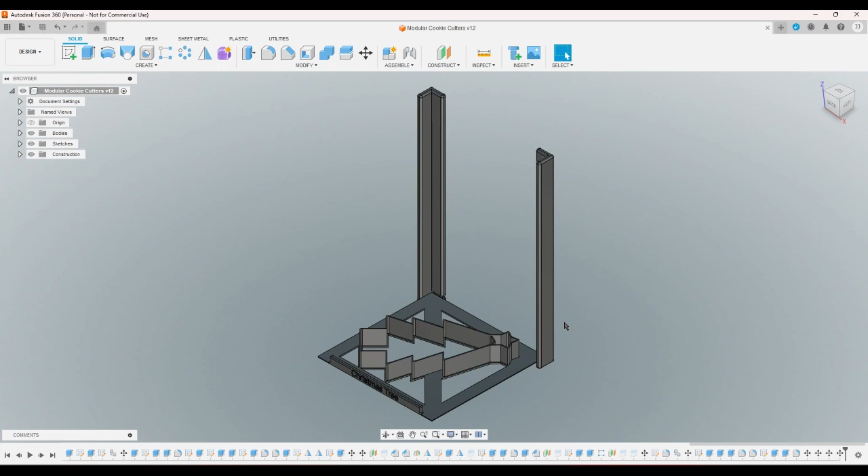Okay, so the Christmas tree cutter is currently printing, and I know that the sleeve works, and I know that the design for the cutters works, so I'm not going to test anything else anymore. I'm just going to make cookie cutters, and each one is going to be its own video.

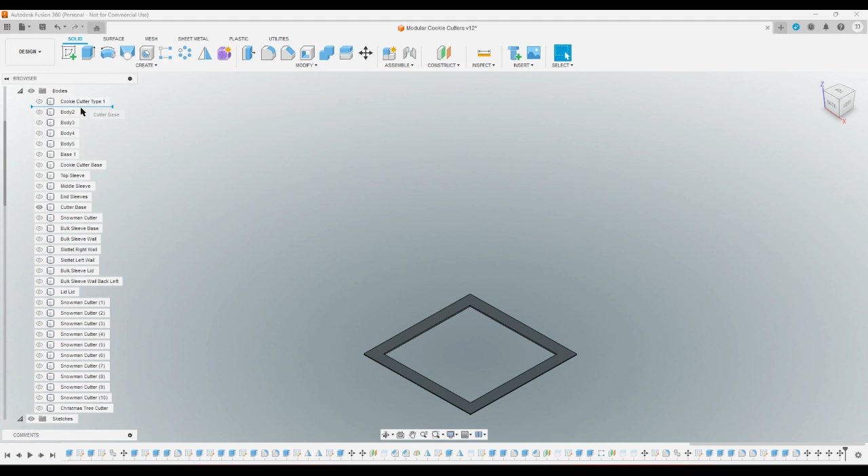So, real quick before I forget, I'm going to rename this to Christmas tree. And I'm going to rename this to Christmas tree label. Alright, and now I'm going to do the reindeer. So, where's the cutter base? This one? Yeah. Can I move this like way up to the top? I hope that stays at the top. Okay.

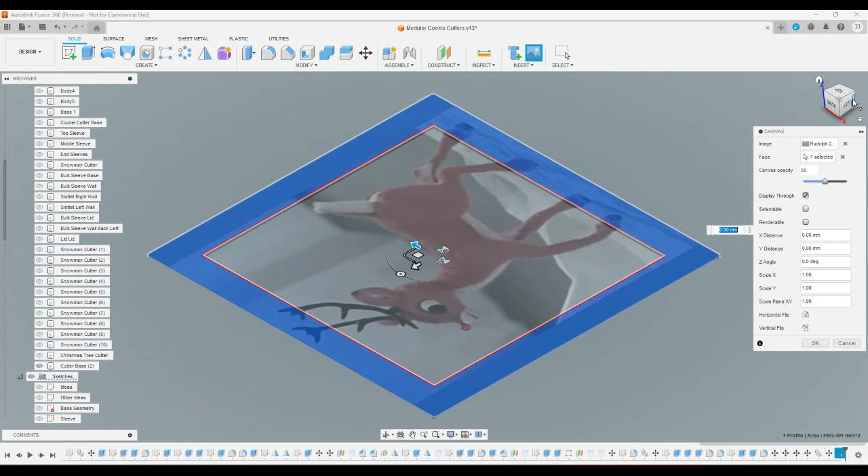Make a copy of this. Go all the way down here. Start a sketch on it. And now I'm going to bring in a picture to trace of Rudolph the Red-Nosed Reindeer. I wonder if, nope. Okay. No, it's actually a little too big. Okay. Alright. This is Rudolph. Where's the... Okay. This is Rudolph from that classic movie. Everyone knows it. And I'm just gonna trace this.

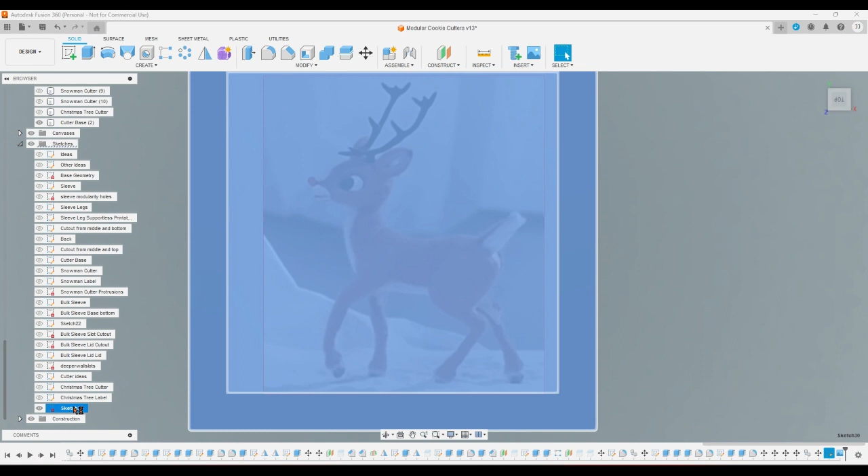So what in the heck? Sketches, construction. Where'd he go? Oh, weird. I guess I gotta make a sketch after I bring in Rudolph. Whatever. Make a sketch here. Okay. Now there's a lot of curves here. And there's a lot of skinny bits. And skinny bits aren't good for cookie cutters because they burn. So this is going to be a bit of a pain to trace.

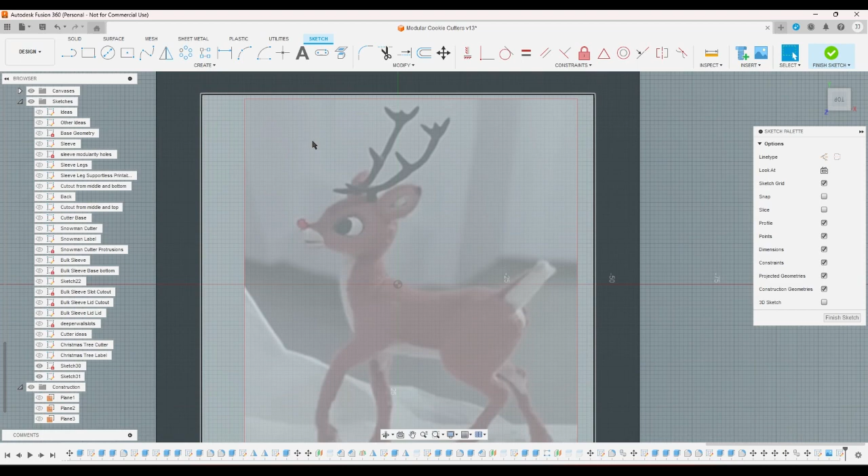Kind of. I'm going to have to take the antlers and go around just the general shape and not the full shape of the antlers because that's just not going to make a good cookie. And I'm probably going to have to do the same thing with the legs. I'm going to have to take his legs and wrap around like this instead of doing the whole leg. So, yeah. And even the tail I might actually change a little bit. I'm going to start with the nose though, because the nose everyone knows.

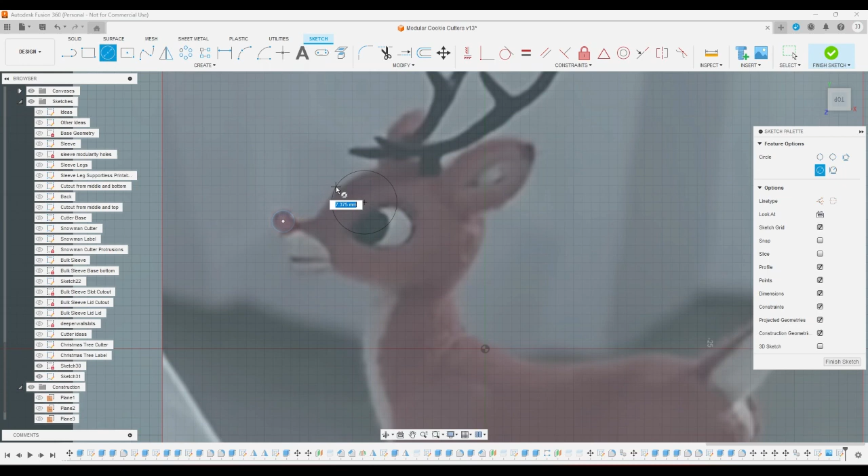Alright. Nope, that's not a good, okay. Gotta go ahead and, arcs are your friend. Arcs are my friend here. I think this one can be a line. Let's see if I go with. Can I go with this? Yeah, that's pretty good. What about this one? Yeah, that's all right.

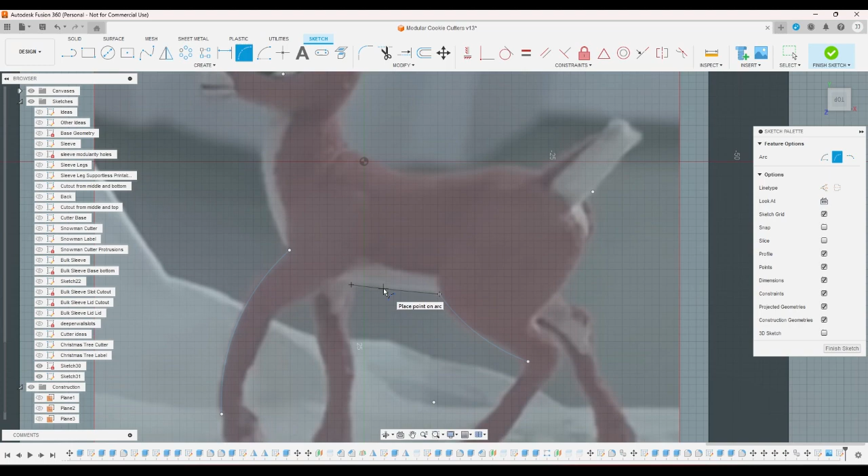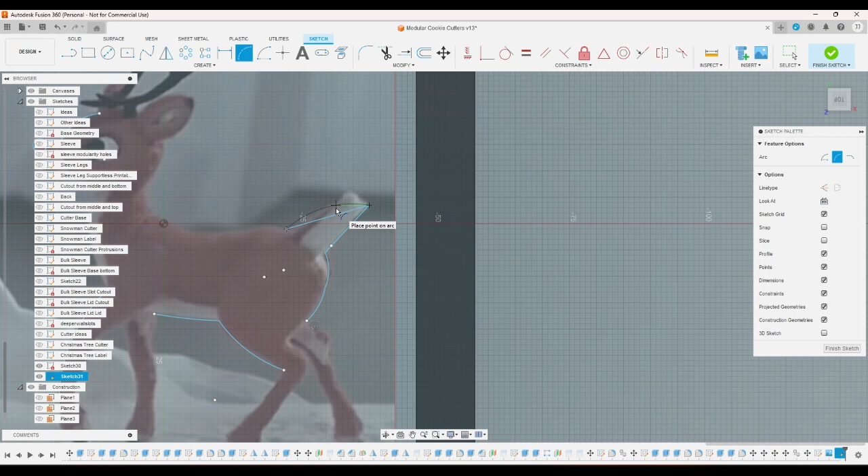Alright. Gonna change that a bit. No, don't make it. Yeah, okay. And then his tail is gonna be a straight-ish line. Should I do this? Should I cut off that white part? I don't know. Alright, I'm gonna go ahead and, I think I can get away with a straight line here.

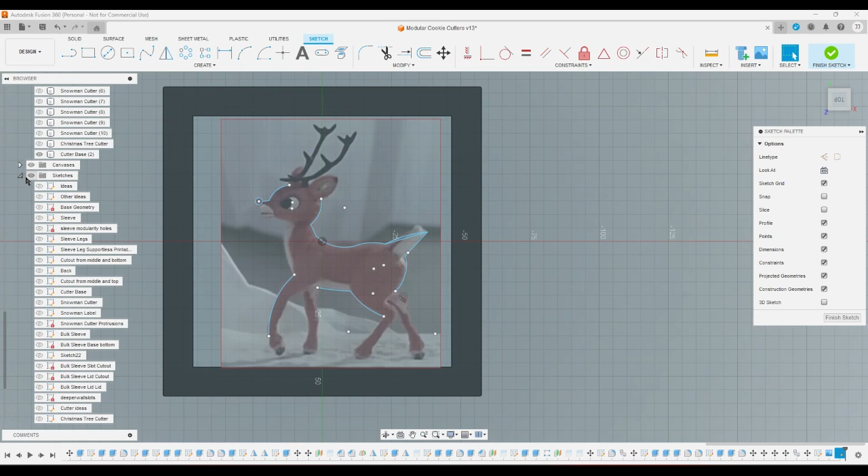Ah, canvases, okay. Yeah, that's looking good. Let me see what happens when I delete that versus if I delete this. Yeah, the curved tail is better. That is, of course, assuming I don't just do that and maybe even move that the whole. Okay, stop that there because that's gonna move. Okay.

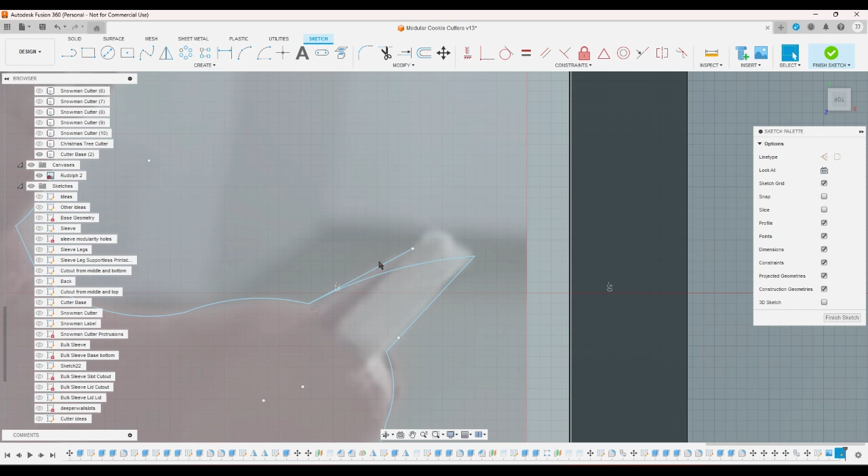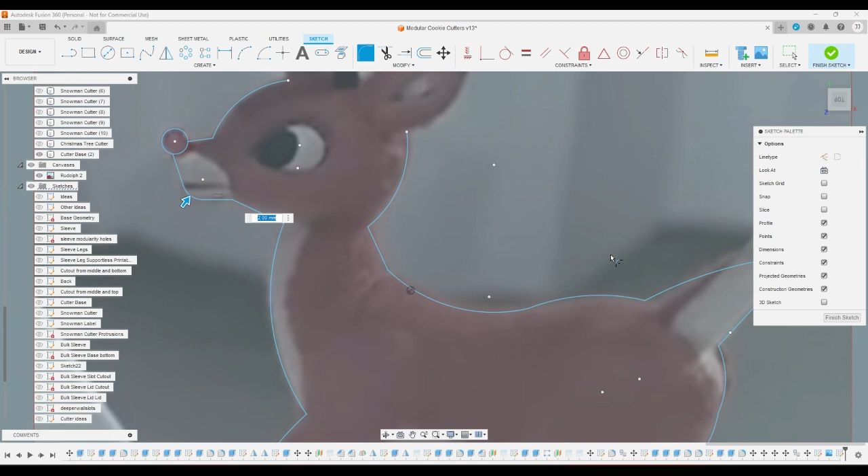Alright, and then I wonder if I can. Yeah, okay. Can I? Alright. I feel like maybe straight line, straight line, straight line. Hang on, something's trying to snap to the grid here. Where's this? Okay, snap is turned off. Let me turn off the grid. Okay, and then if I just, yeah, that looks good.

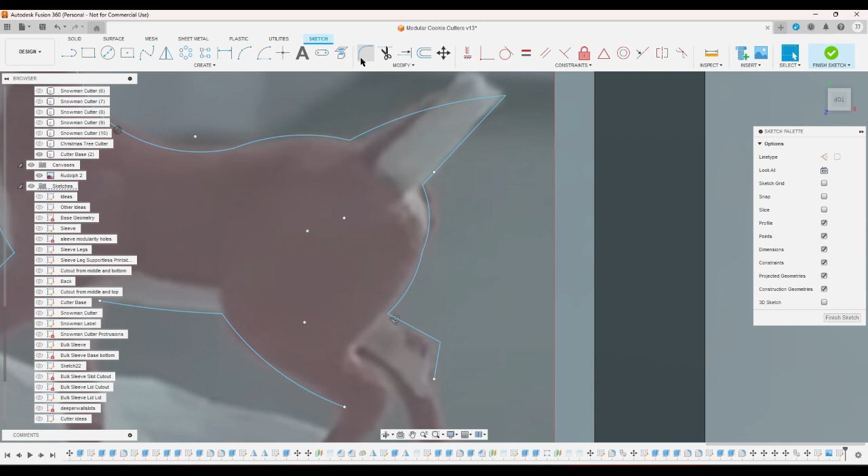Gonna do his ears here. At least this one. Then I'm gonna go ahead and finish off the head. And now I have to, no, not yet. I'm gonna ignore the antlers till the very end. Let's do a straight line like that, curve that in, and then another straight line here. Yeah, that looks good. That's starting to look pretty reindeer-y.

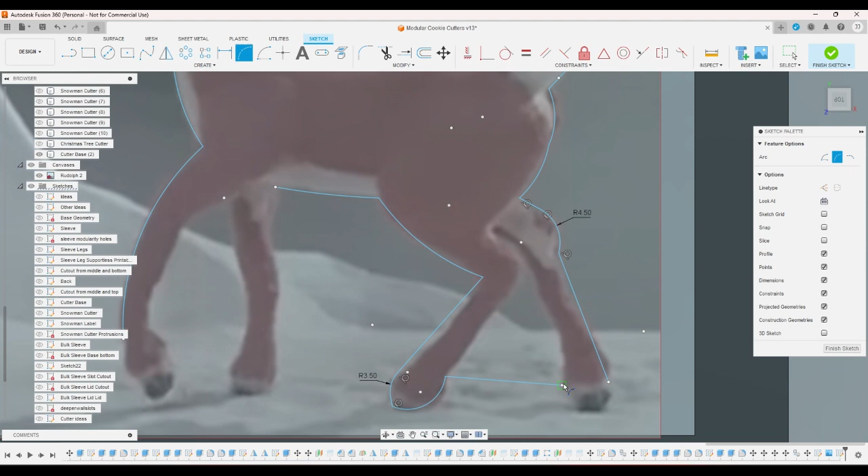This will be, alright, and then this will be a straight line to those, and if I can... Okay, now this is the part... Oh no, that's disgusting. That looks ugly. Okay, I'm gonna add the legs in because maybe I can just have them as details.

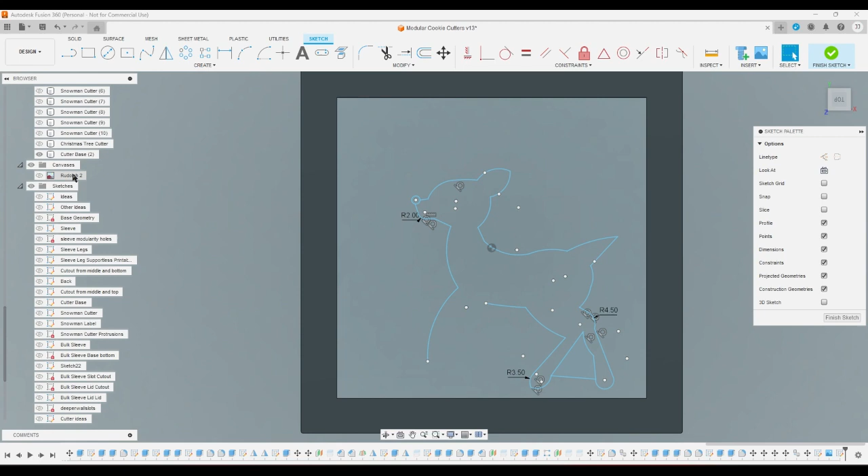Yeah, if I have the legs as details. Can I extend this? And that? Yeah, okay. I'm also going to go ahead and delete this and put that there. Let's see, this looks like it's going to need two curves.

And then this one is going to go all the way. Yeah, I'll just do that. Straight line down here. And then a curve up to about there. This leg is really curvy, jeez.

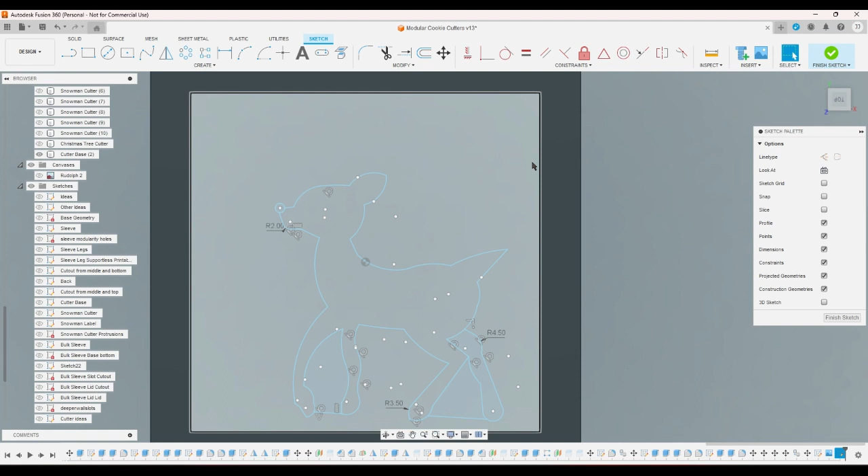And then except for some bits somewhere that are not connected, I've got pretty much all of Rudolph here. That's where they're not connected. That's close enough that I can just, and that should not be noticeable. Yeah. Okay, so I've got all of Rudolph except for the antlers. Now I gotta do the antlers.

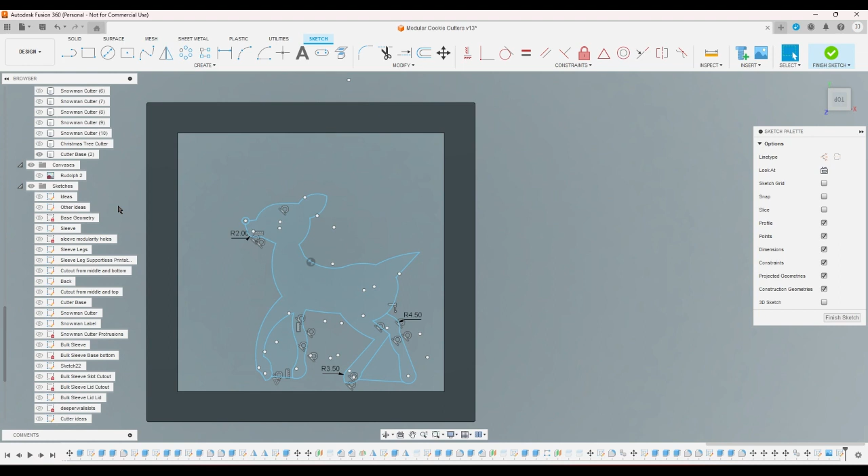I'll go ahead and ignore that second ear. Okay, so then I think a good, I'm not sure if this is a good way of doing it. I don't think. Okay. And then if I just, you know, if I go ahead and keep a curve here for this, but no.

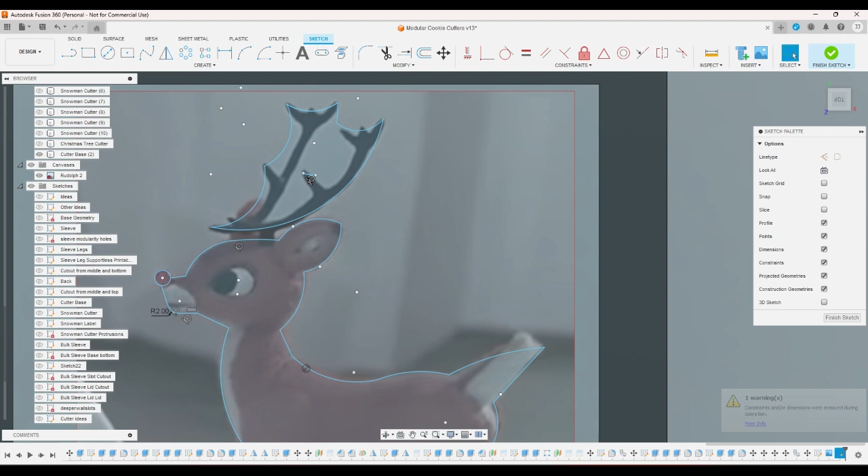And I just extend this one out to there. And then I go ahead and trim all of this. Does that look like antlers? Something. I think if I keep this much as the outline and I use the inside bit as details, I think that's what I should do.

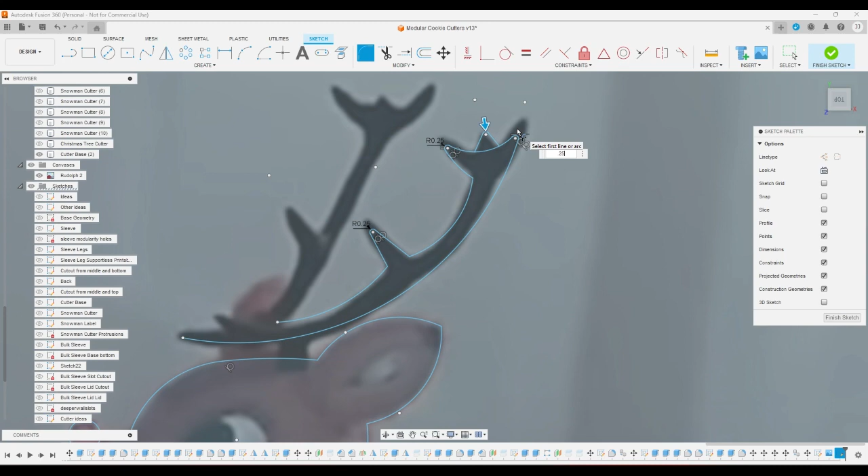Let me just trace the antlers themselves. Then I'm just going to go ahead and, yeah, I think that's a good idea. The antlers will be details that are going to be inside of a bigger outline, I think. Like how the legs are going to be.

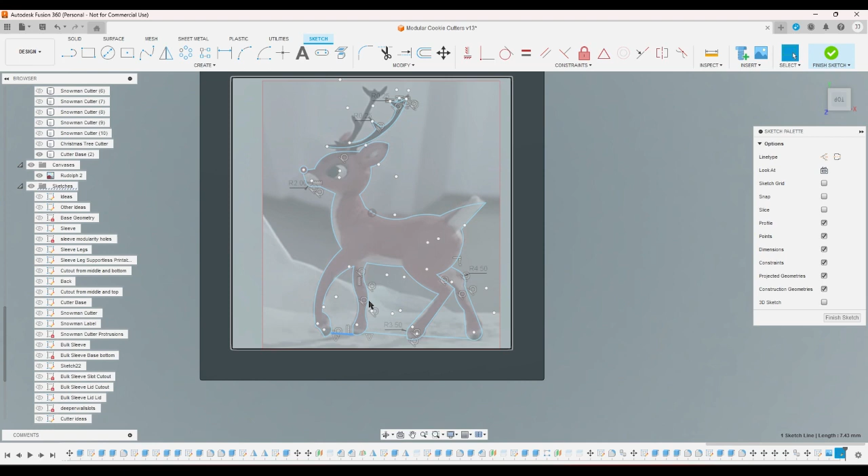And you know what? Since the legs are going to be details like that, might as well have the whole thing down here be cookies so that these won't get burned. Alright, this one's a lot straighter. I can probably get away with just a line here. Yeah, barely, but I can.

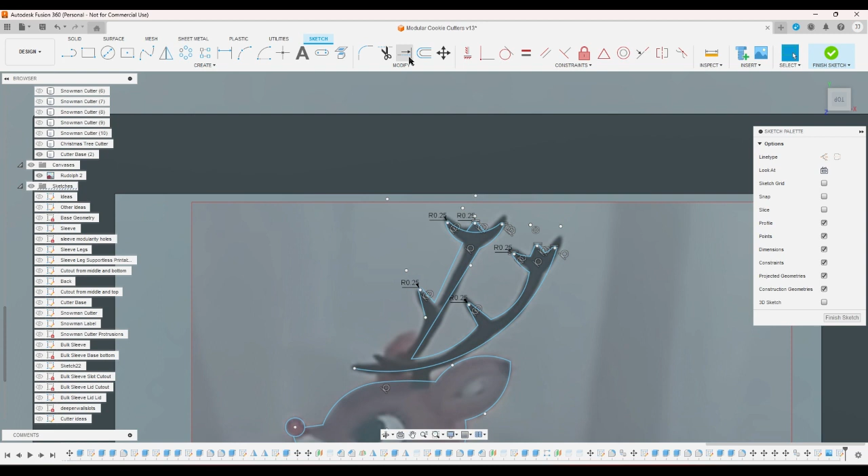And then, what? I don't know what happened there. Yeah, that's good enough. Yes, I know. And then if I put this there... Whoops, wrong shape. It's supposed to be an arc. And then I get... Holy... Alright, and then if I just go ahead... So that's the shape of the antlers.

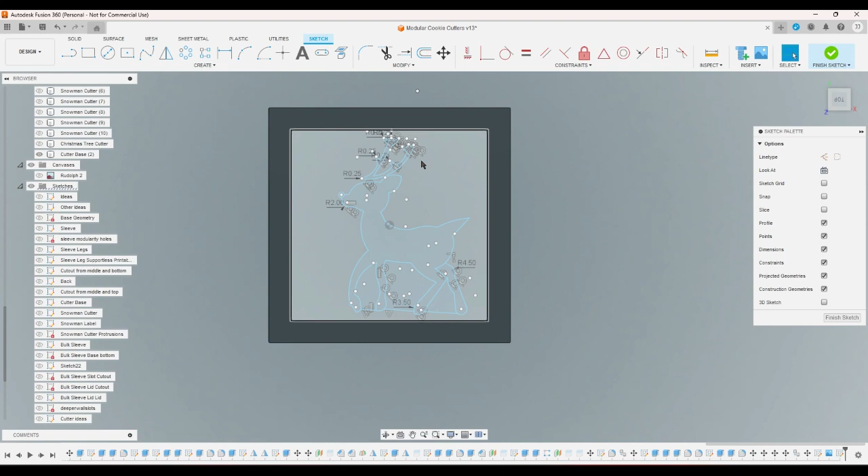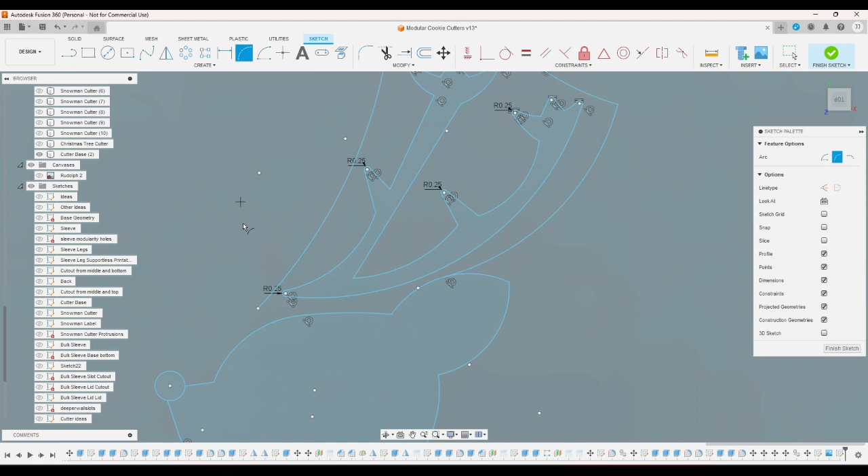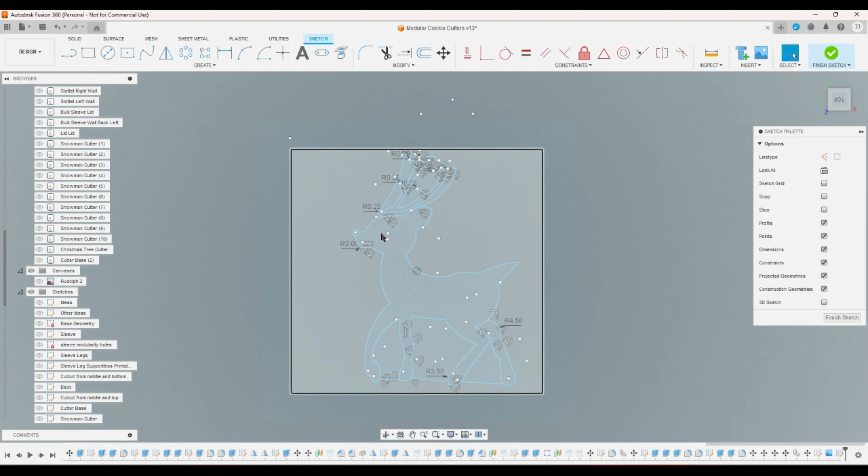So now if I go and just kind of... Well, I might as well make it as nice as I can make it look. Wrong thing got trimmed because the stupid program is like, oh, you're hovering here, that means you want to click there. Alright, and then... I don't see... Wait. I don't see... Oh. There. Okay. Good. That means... Okay.

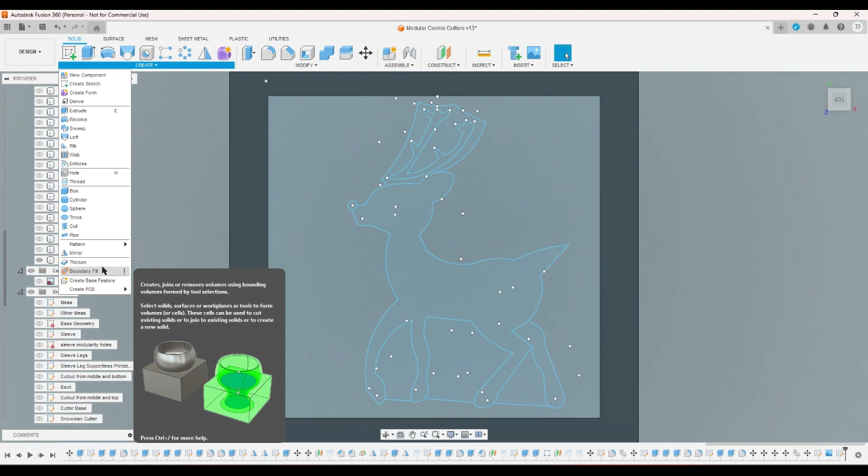Now the hard part is I gotta figure out what to offset by what. I wonder something. Can I... No, I can't do that. Okay. Boundary fill creates, joins, removes volumes using bounding volumes formed by tool selections. That's unfortunate. Okie dokie. Offset this by cutter thickness.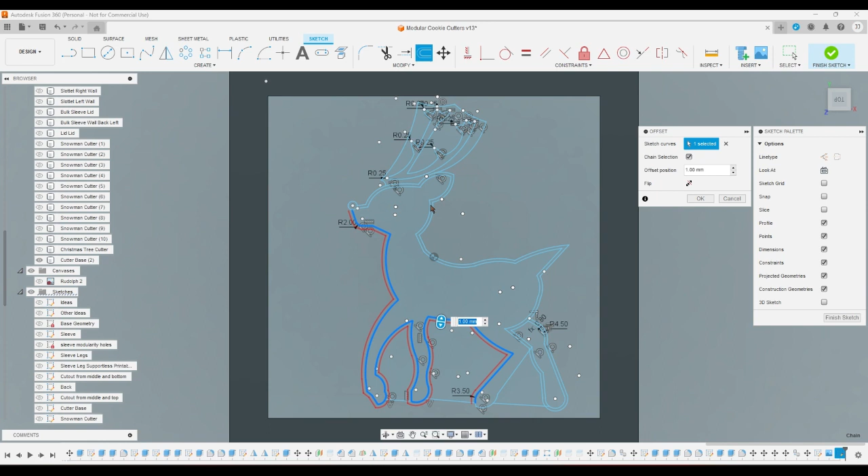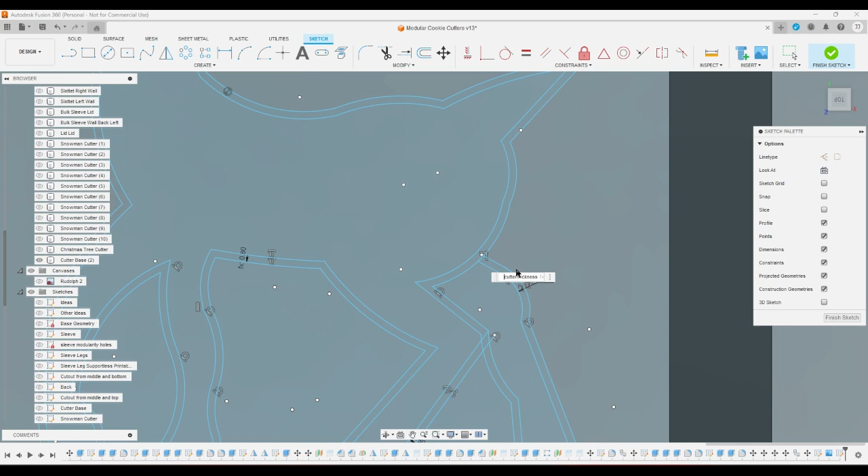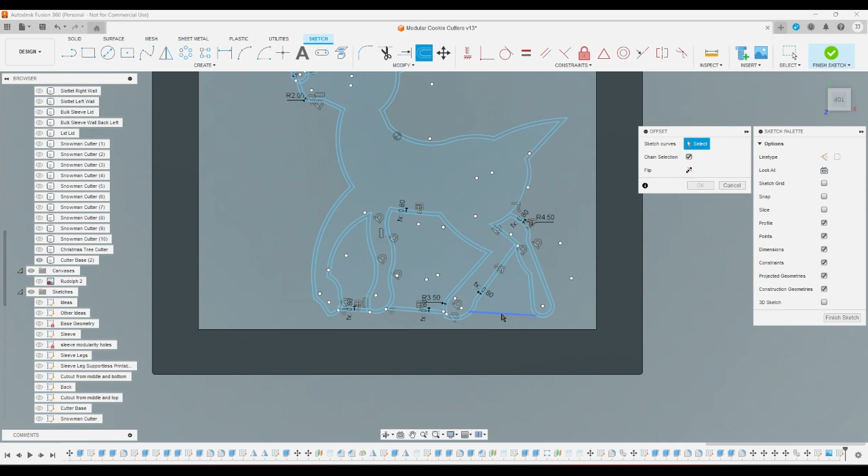Let's see, this. Okay, those two intersected. Let me just offset what I can. Oh, cool, cool, cool. That puts that. Alright, so now let me figure out. Oh, wait, hang on. This. Alright. That one has to be negative for purposes. Alright. So now let me try and figure out what I can do about this.

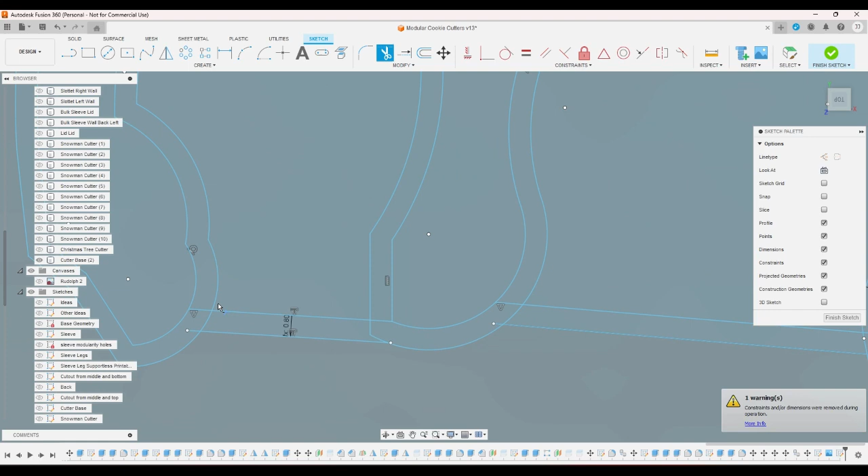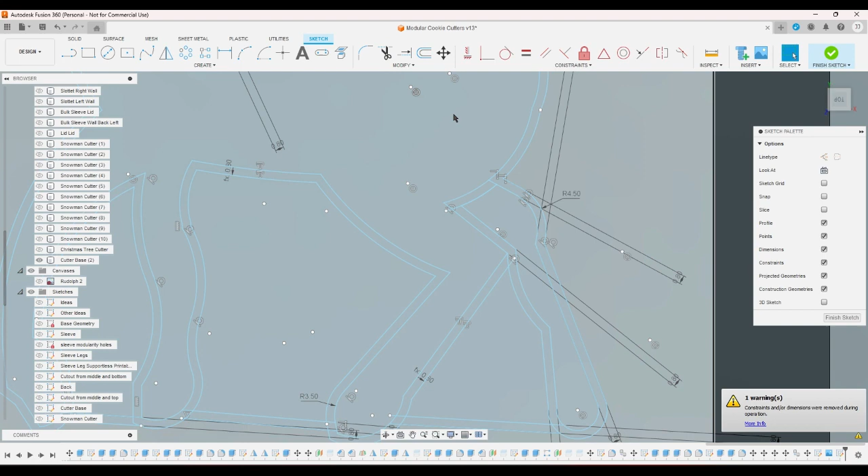Okay, so then if I trim here, right? Okay, good. That's its own section. That's its own section. That's its own section. That's not its own section yet, because it's still connected to this. Now it's its own section. So then if I extend this one, and then I trim here, and then I trim here, alright, then I get this.

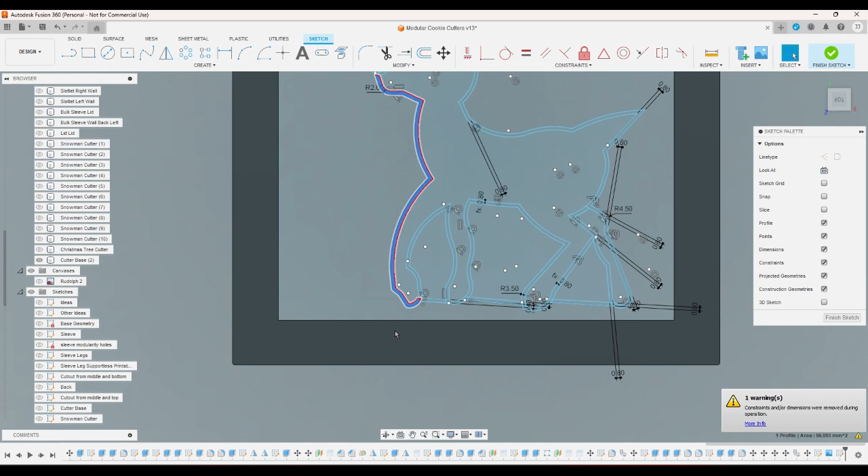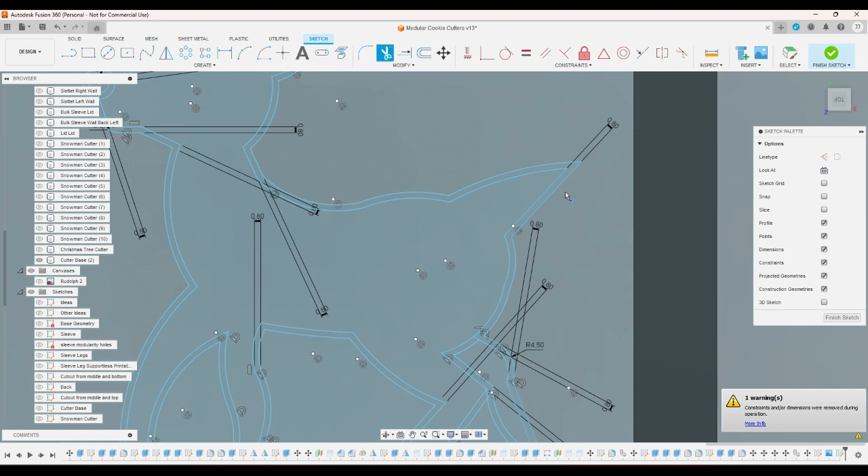Trim these. Okay, so I've got that whole frickin' section. Then I've got this, going all the way there, and then I've got this. Okay. So I think I can make sense of the bottom half now. Except that I forgot to round off that tail there. And if I offset just the tail, I just want the tail. Give me, stupid thing.

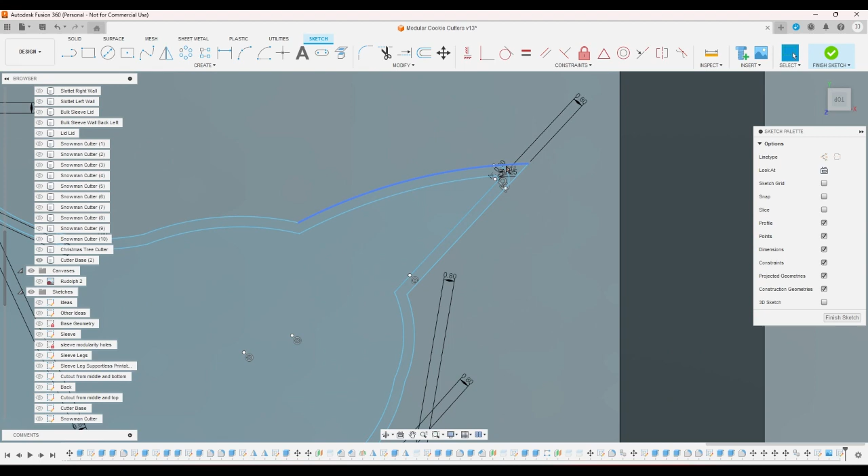There. Okay. That's going... Okay, cool. I just gotta figure out how to force that to... Oh. Oh, that is something I was afraid of. Okay.

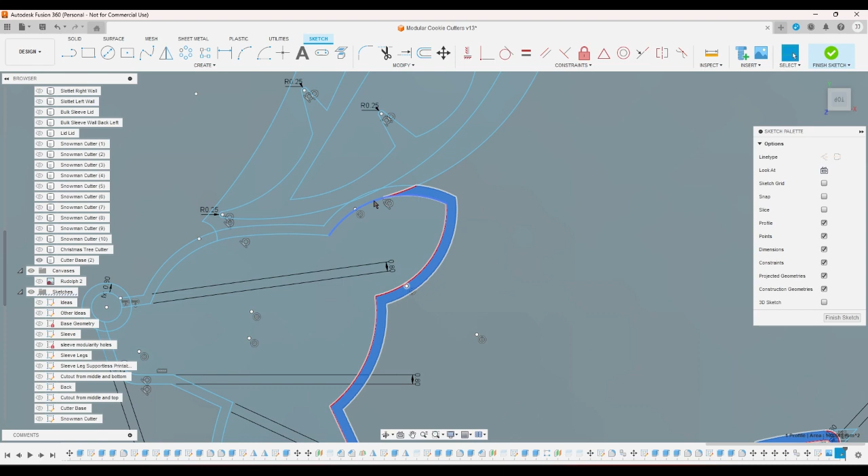Gonna go ahead and trim. What do I want to trim? No, I don't think I want to trim anything yet. But I have to offset this piece by negative cutter thickness. Because if I get all of this out, and then I also get this out, then this can be...

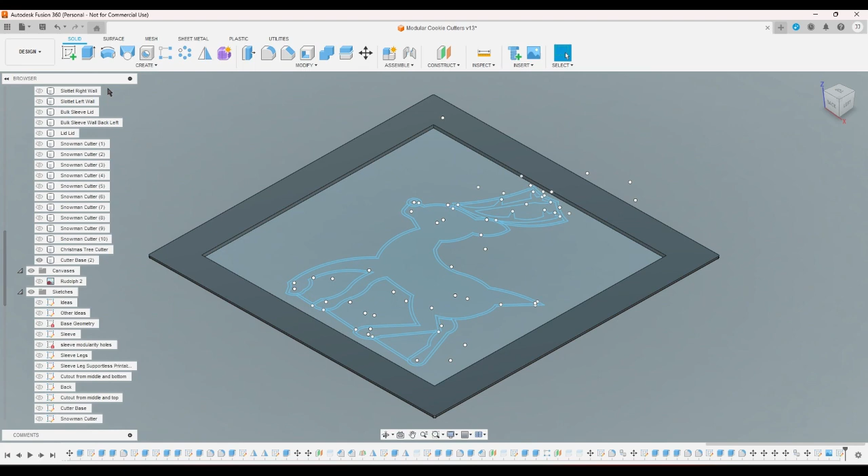Okay. I'm gonna go ahead and just get things started here. This one's gonna have to be several different sketches because I don't want it to get too messy, and it's already very messy.

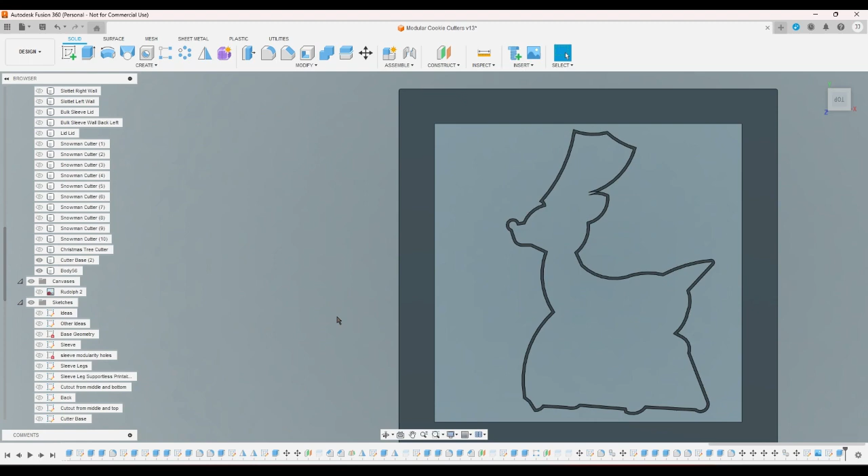This is the cutter height. Alright, so what's that look like? That looks like a really... It looks bad right now. I'm not done yet. Okay. This has to go basically to here. And get this in there. Okay.

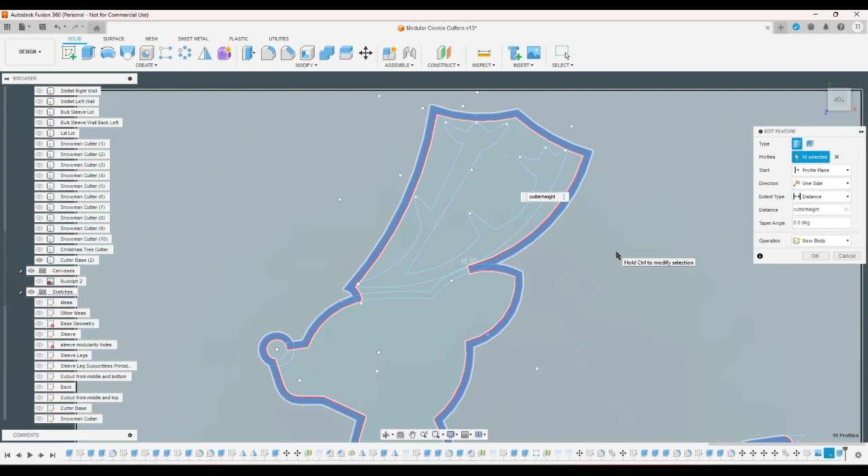Okay, so now if I bring back the sketch, and I extrude this part, and these parts.

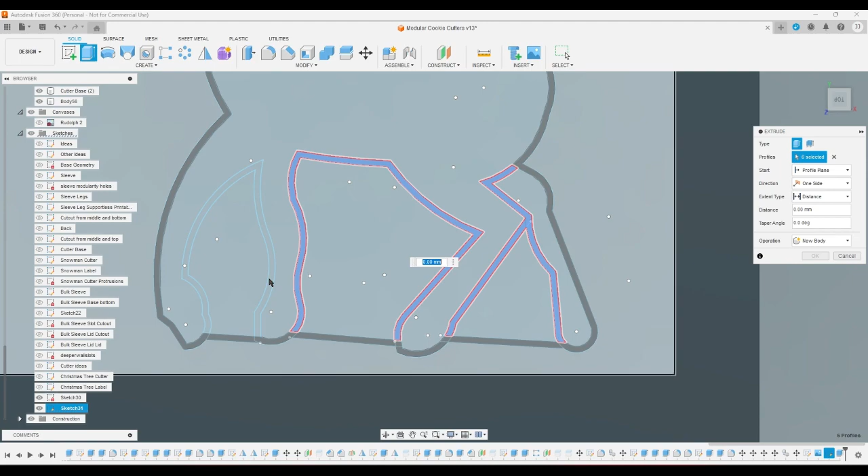To cutter height minus detail depth. I don't know where that came from. Okay. And then so now I have what should look like a reindeer. Yeah, okay.

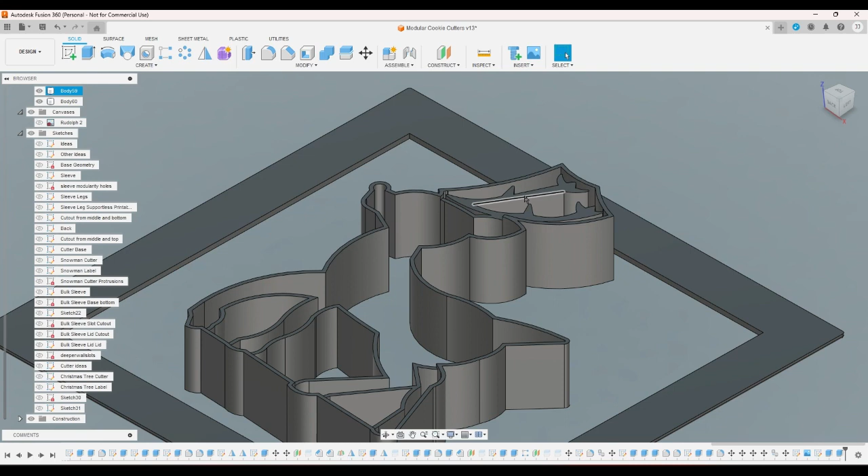I'm gonna put a sketch here and project... why are these not the same? Okay, cool. So now I can put a sketch here. Go ahead and project this.

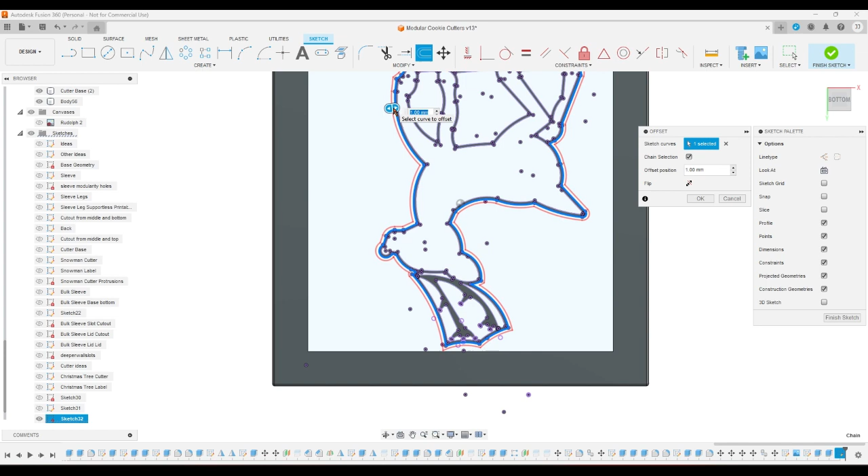Offset the outside bit by that. Offset the inside bit by that. By negative that. And then if... I might just close this, but I don't know how that'll affect anything.

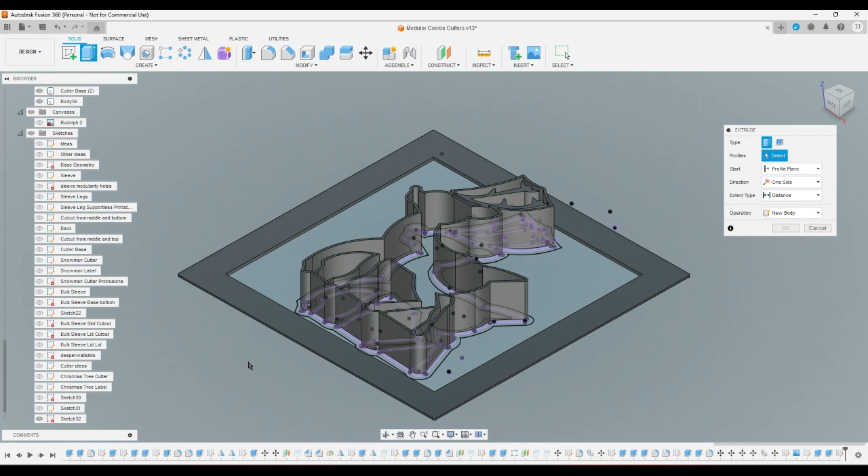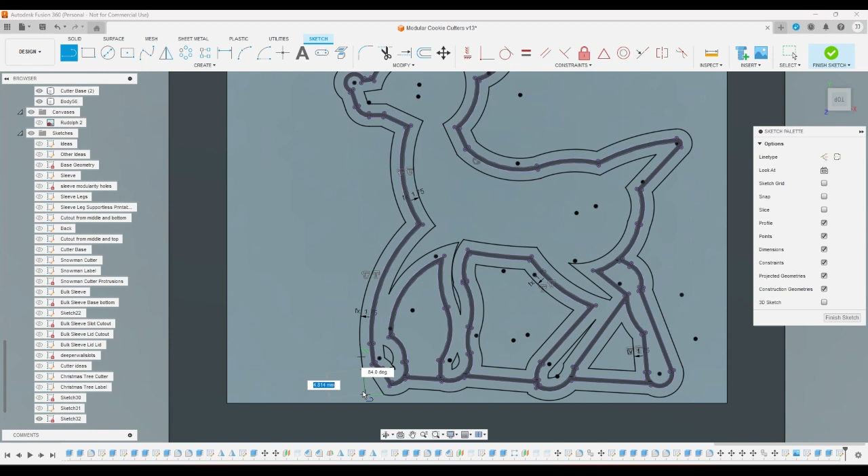Go ahead and close up these gaps here. Hang on. Okay, I'm gonna have to do a little bit more. Okay, and then this one. And then I'm gonna go ahead, put this just straight down, will work.

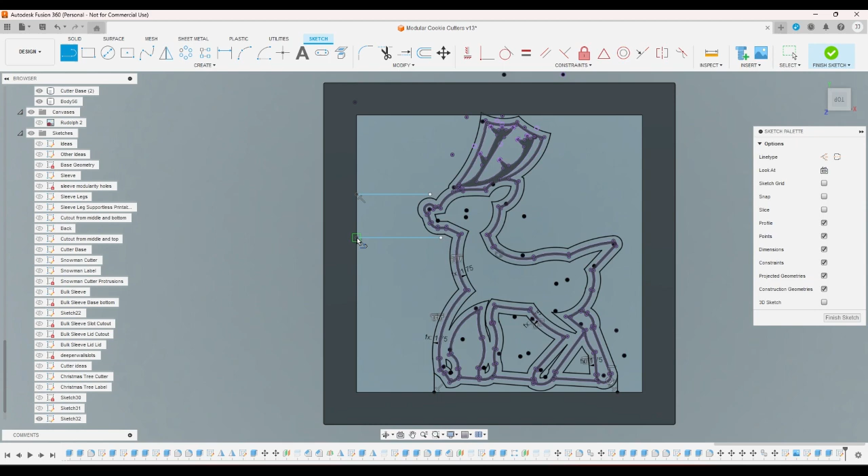Let's have it held by the nose here. And okay. Now this one.

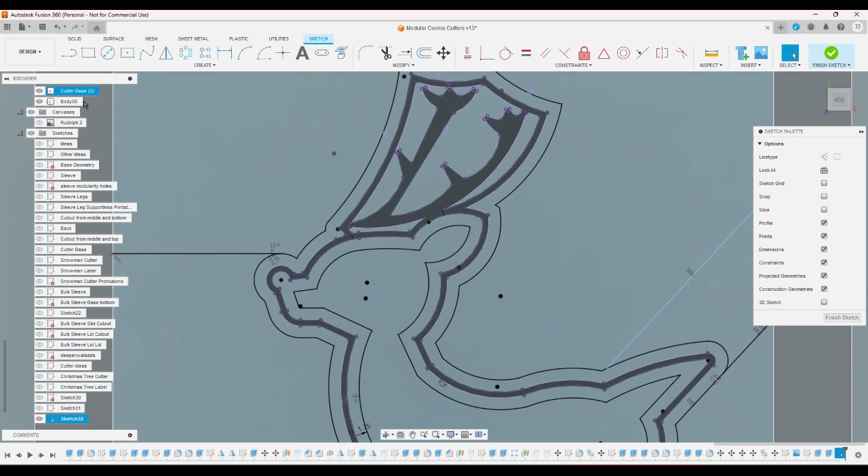Okay, gonna go ahead and put this line just going out that way. And extend that all the way out. There, now it'll be attached.

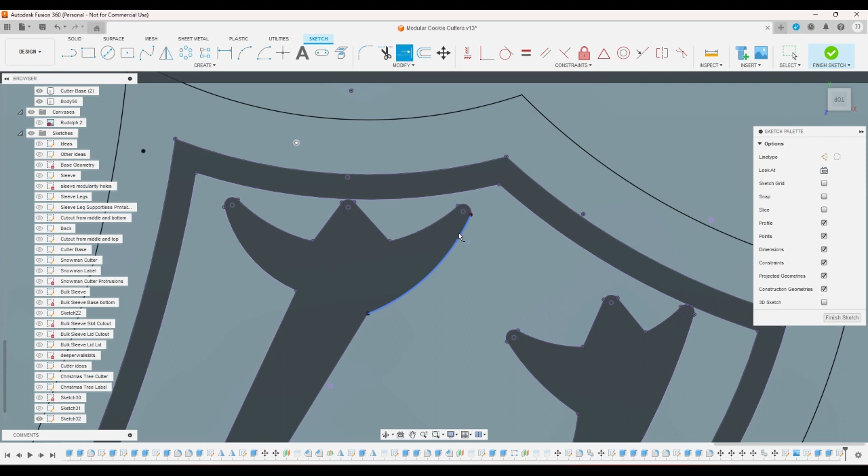I'm going to draw an arc here and extend that arc out to there. Then I'm going to draw an arc here and extend that arc out to there. Because that way I will have this bit here to work with. So now if I go ahead, I can do this.

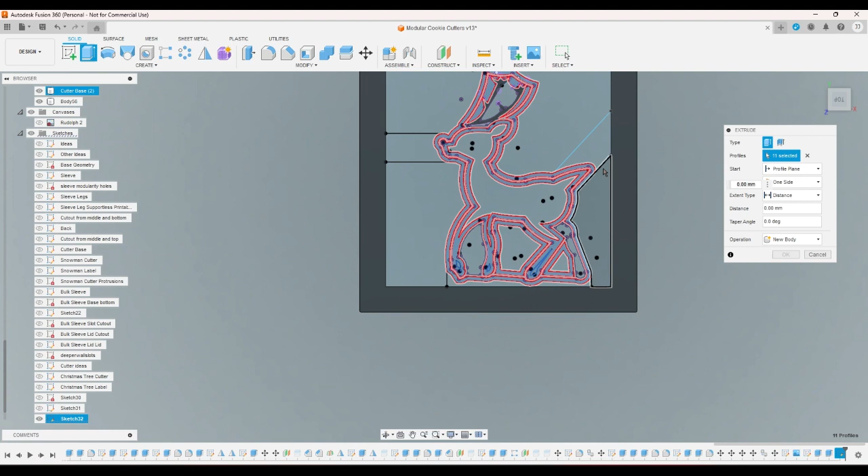This one. And get these three shapes as well. Okay. All right. That is what it looks like. Okay.

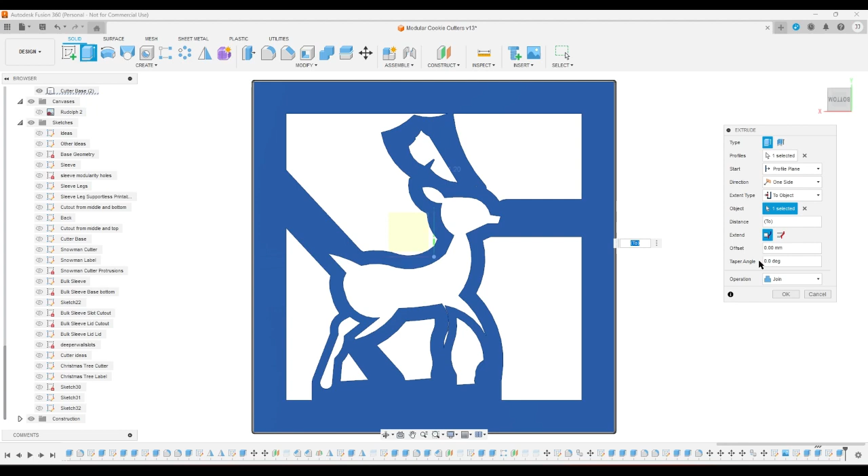And then I have to extrude this whole thing to here. Okay. Oh my goodness, a teeny tiny little hole there. Can't even see it. It's right there. That should have been part of this. Okie dokie. Okay.

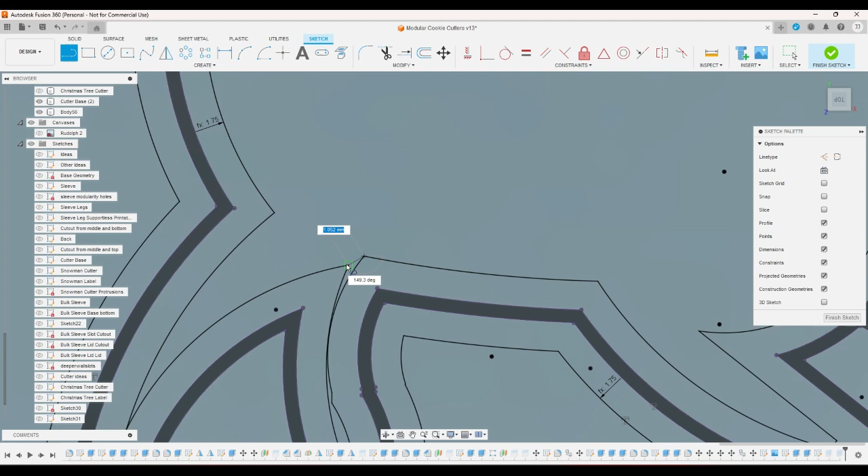Then on this sketch, that, and I feel like this is a little bit... No, that's not gonna. This too. Okay. There. So now if I have the snowman, yep, it interferes with the snowman and the Christmas tree. Alright.

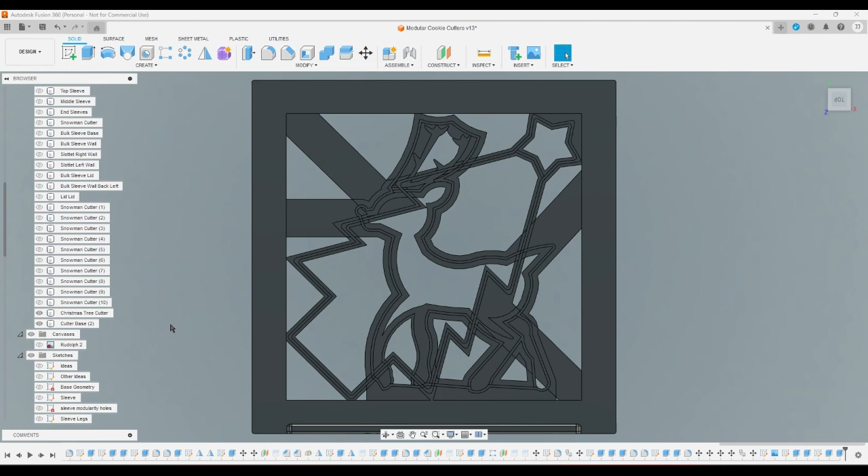So now I've got this one is Rudolph cutter. This one is Rudolph base, and then, oh my god, clicking literally anywhere selects a plane, and that's freaking ridiculous.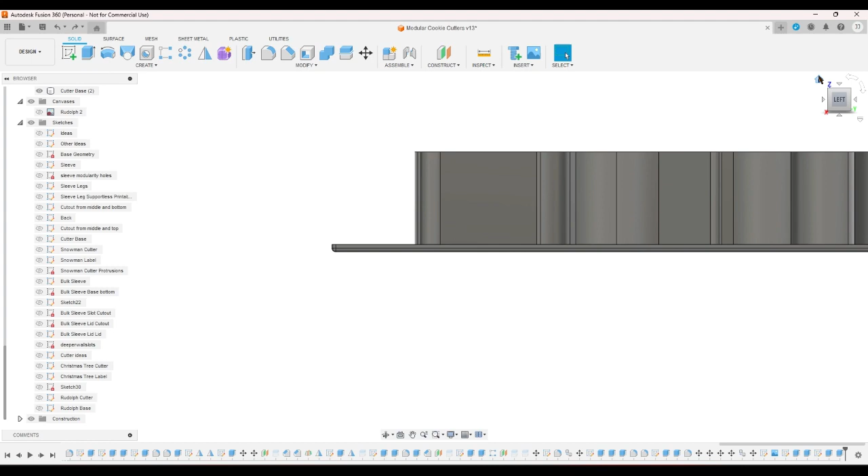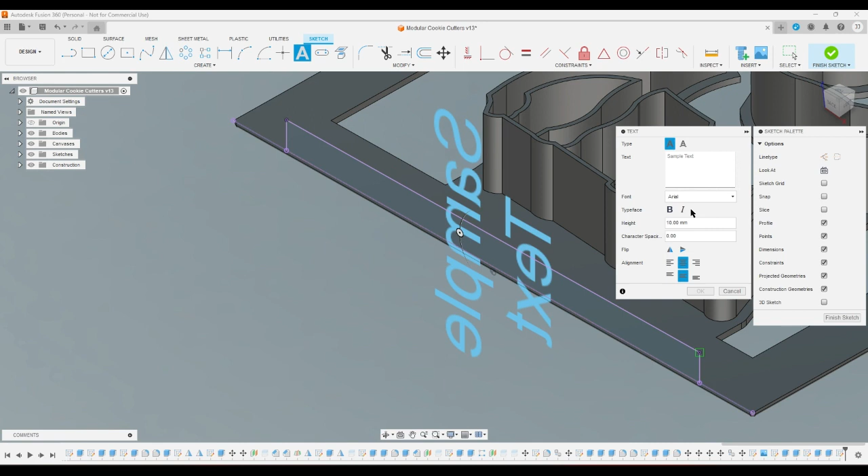Okay, and then what did I do? I got snowman label. Project the snowman label. Put that there. Why is the text rotated?

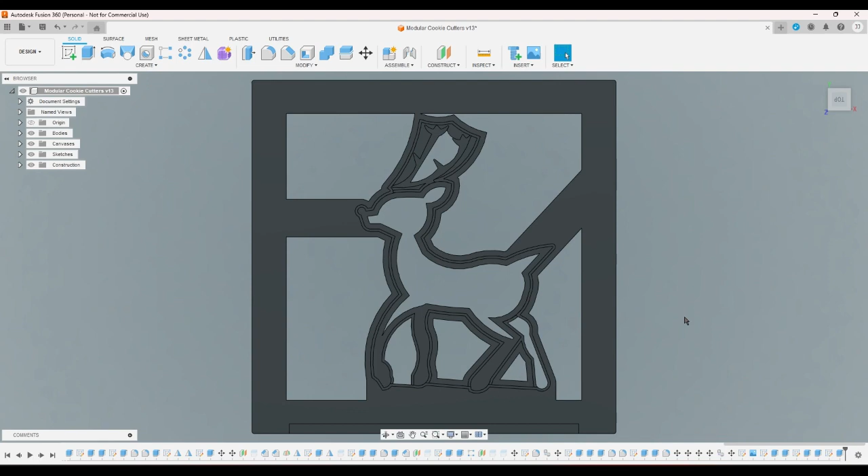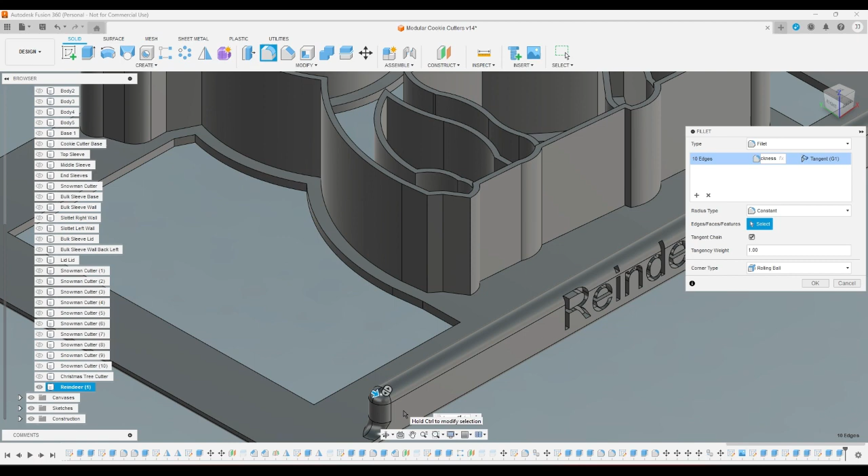And then all right. Okay. Save. Nope, gotta rename it to delete that number in the name. Okay, now I can save it. Save to... there. Alright.

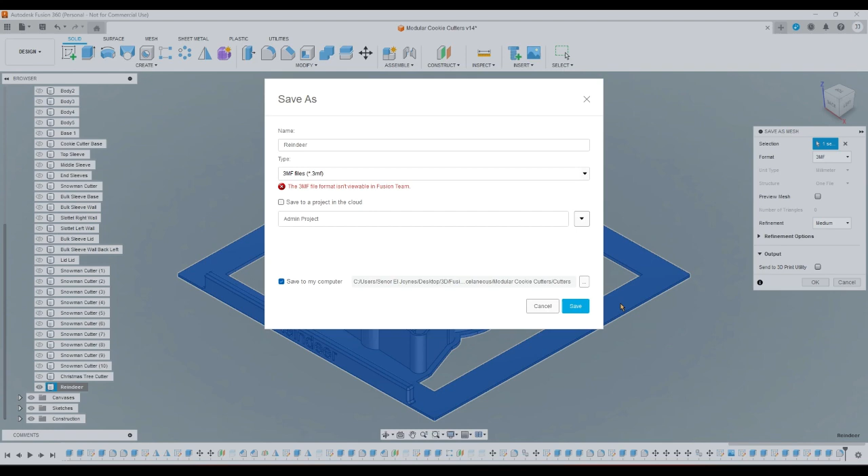Now I'll print that out, and then I will come up with another cookie cutter. What have I got? What have I got for ideas? I've got Christmas tree, I've got reindeer, an ornament, and Santa. Santa for sure. I guess I'll do Santa next.